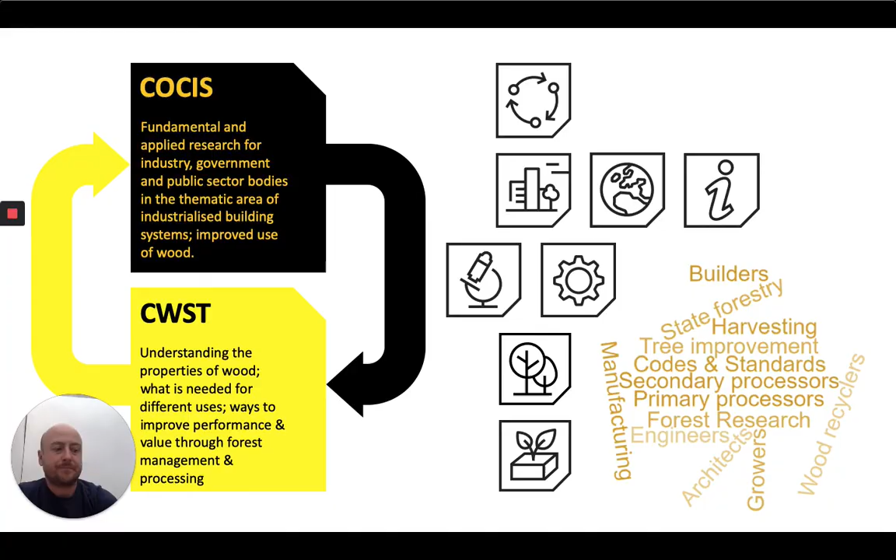So in that regard, what we do essentially generates outputs, working with the Construction Scotland Innovation Centre, and we have the opportunity to interface with the Innovation Factory there and also their funding support mechanisms and the wider construction network that they're engaged with.

The work that we do cuts across the range of off-site construction products and systems, from panelised and low levels of enhancement, that's like open panel construction, timber frame, all the way to fully enhanced panelised systems with windows and doors pre-installed. Mechanical and electrical services can also be pre-installed, as can the external facades and indeed the internal linings. And of course that can move forward into modular or volumetric construction, which can also include things like bathroom pods, where the sanitary ware is also included.

Bringing these systems together can create hybrid forms, or indeed bringing timber technologies, concrete technologies and steel technologies together can also create hybrid forms and systems. So we also think about it in terms of the hybrid nature of what can be delivered through standardised products, creating mass customised solutions. And in the mix of all of that, there's of course sub-assemblies of the component parts, such as I-joists or trusses.

So these sub-assembly components and parts can be standardised and also brought into that sort of product family architecture for utilisation. So we've worked across the spectrum of that, and those products and systems that we've worked with industry to evolve have been utilised in live projects such as the Commonwealth Games Athletes Village, which has mass timber walls, for example, and closed panel timber solutions. The Dyson Institute of Engineering and Technology, which our BEx scholars were able to get involved with.

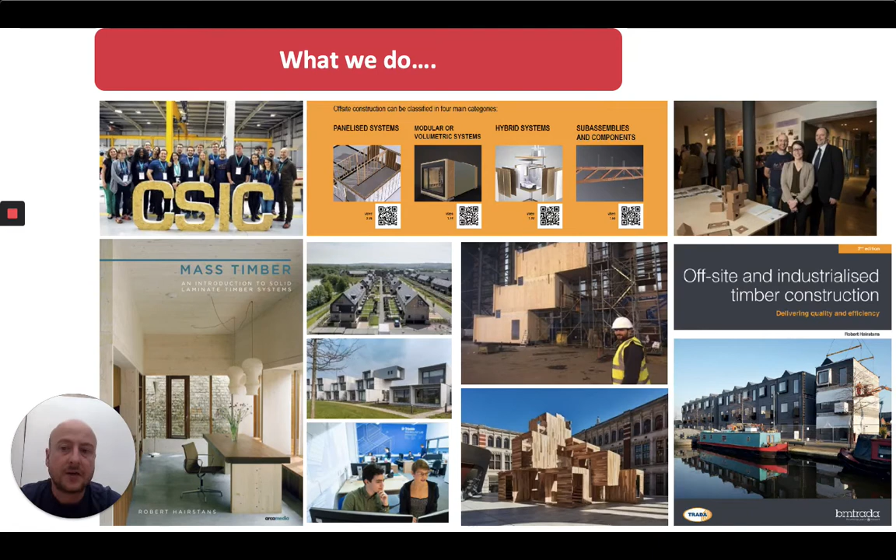And I spoke about international. Well, as an example of that, the American Hardwood Export Council demonstration project which is exhibited at the V&A called Multiply, using tulip wood for CLT production. And we look to digitise all of this, and we have a Trimble Technology Lab at Edinburgh Napier University in that respect. And of course this content is published, mass timber as an example, and also offsite industrialised timber construction.

So why I think this is incredibly important is I think actually in Scotland we have a real opportunity with respect to our renewable and natural capital. Of course, largely on the premise of our available timber resource.

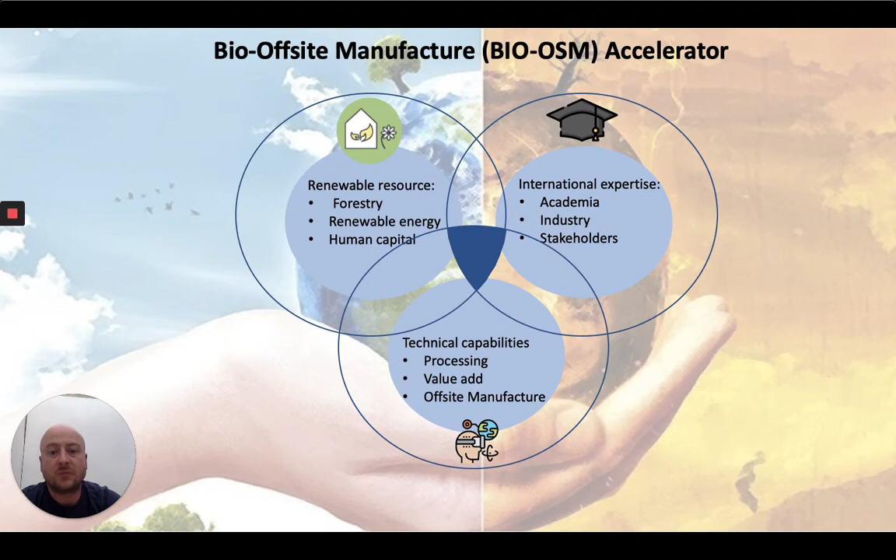So how we can utilise that forest and renewable resource, and indeed the human capital that exists, the skills and knowledge. Obviously that's something through the Offsite Ready project, for example, that we're trying to affect more. Then we have the international expertise which resides in the Scottish context, both in terms of the academic, industry and stakeholders, and indeed the technical capabilities which I spoke to in terms of the processing, value add and off-site manufacture. So how can we harness all of that to make substantial change?

So we have a forest resource. It's worth a substantial amount to the economy, not just in terms of the dimensional lumber which is produced for the likes of structural applications, but also in terms of what it can do for things such as recreational purposes. So it means a lot to the Scottish economy at scale. So it's thinking about it on those types of level, but indeed how you can maximise the use of that renewable resource for the delivery of the built environment.

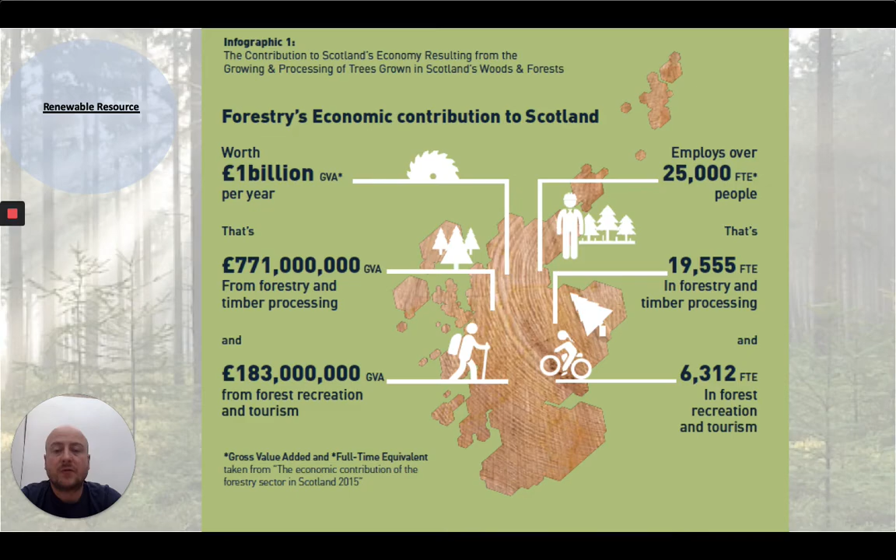And that's borne out through things like the Innovation Factory and their off-site lines, the opportunity there to make mass timber components using the vacuum press. At Edinburgh Napier we have testing facilities where these products and systems can be looked at from a structural, thermal, acoustic perspective to look at their credentials for utilisation within the built environment.

I spoke about the Trimble Technology Lab that lets us capture this information in a digital form and move it towards building information modelling and ultimately digital twins, where there's a feedback loop into the digital model to validate and verify what's been produced through that digitisation process. And of course we have the inherent capital that's been invested in terms of off-site and pre-manufacture.

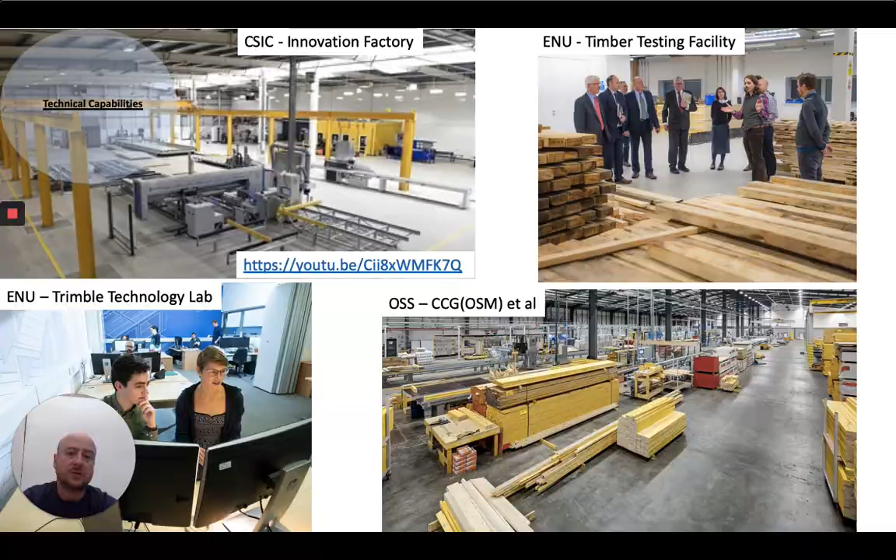Skills and expertise, Offsite Ready is certainly part of that and has now launched. The work that we've undertaken with the Built Environment Exchange, having our graduates and undergraduates be able to engage directly with industry, and very much that's the premise for this project indeed. So this is all about how do we accelerate the careers of people by giving them a broader understanding but also engaging them directly with industry. So we hope to make a real change in that respect.

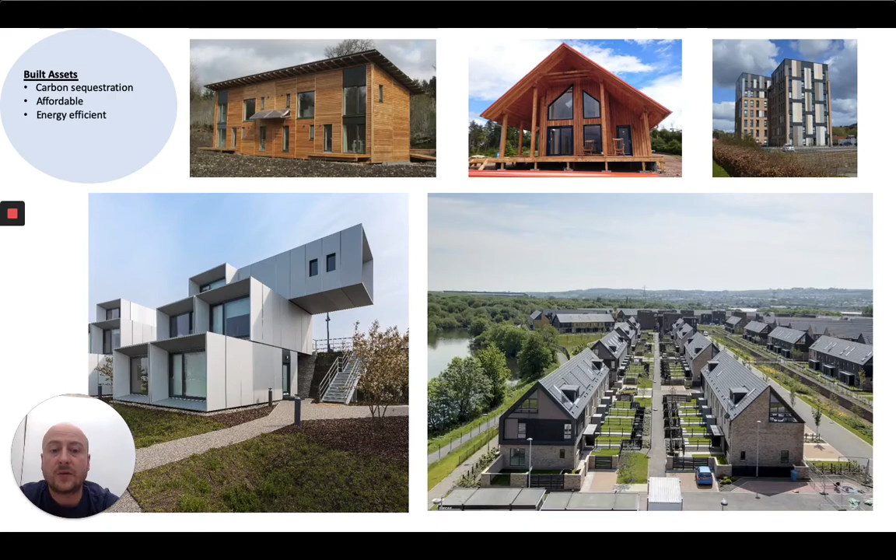And as I spoke to as well, there's a whole series of built assets out there, not just in the residential sector, and the case studies we see in front of us go from the likes of Dunsmore House, from MAKAR Construction, top left, to the projects delivered by CCG, such as the tallest timber building in Scotland, top right, in Yoker. I spoke about the Dyson project, which was delivered by Carbon Dynamic, and again the Commonwealth Athletes Village is a really good demonstration of what can be done through public and private partnership and collaboration and cooperation for the delivery of the built environment. So there's numerous case studies out there which exemplify this, and this all aligns with the premise of the circular economy.

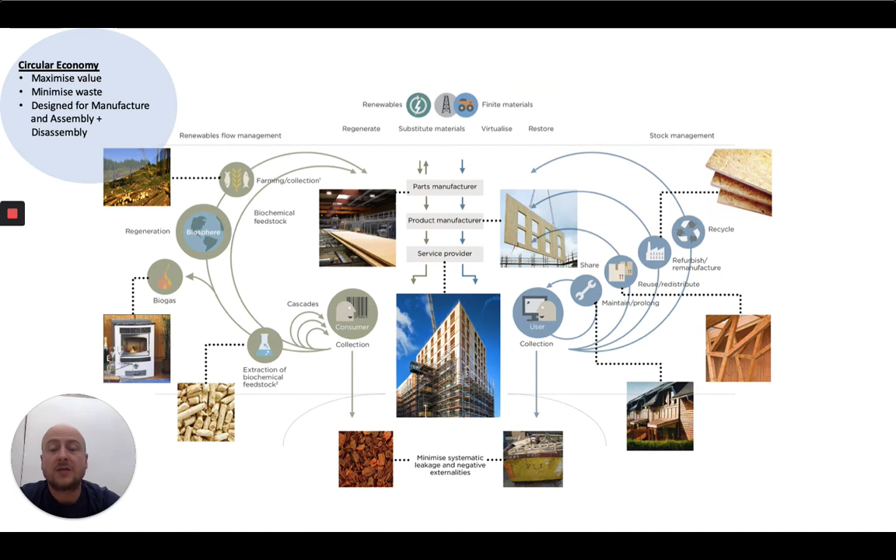How can you take renewable resource and maximise its value in order that you don't waste it and return it to the atmosphere in the form of carbon, by putting it to landfill. So before we burn it and use it for biomass, how do we maximise its utilisation within the built environment, and think of that with respect to design for manufacturing, assembly and indeed disassembly. So when that built system needs to have a change of use or be dismantled and the product's repurposed, we've thought about that at the start, such that it can take place, and we can always maximise the use of the resource and correspondingly the value that it has, in order that we don't release carbon back into the atmosphere.

So other things to think about, of course, are that digital piece, thinking about digitisation and digital twin, how these digital models can harness the global warming potential, the environmental credentials of the product, the cost information, the productivity, the waste, the logistical information from a project management perspective.

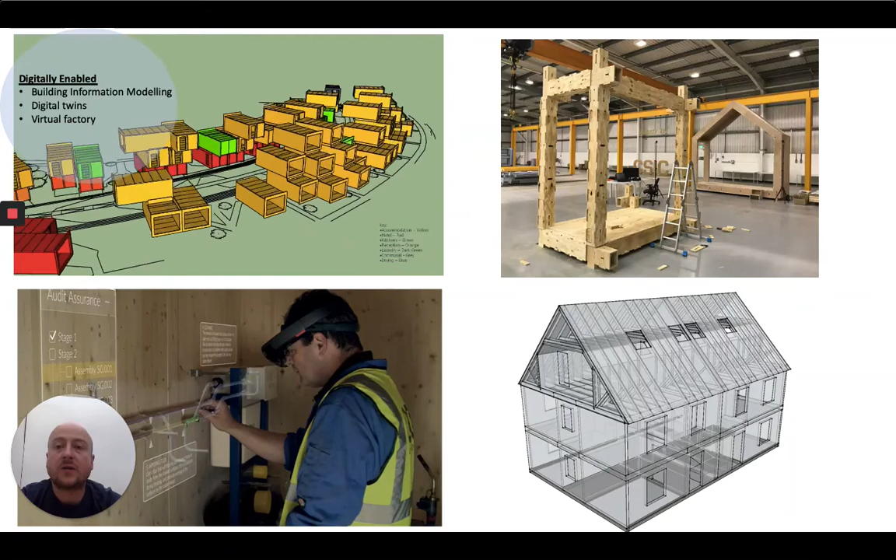How can you build as much into the digital model as possible, such that when you utilise that digital model and change aspects of your design, it informs that decision making process in real time. And ideally you create that digital model in a manner which, when the project goes live, you can track that information from forest floor to built asset and during its useful life, and enrich it.

And during that process, you can use digitisation even for things like virtual reality, augmented reality, and indeed explain to the workers where they need to install the services or apply tape for cold bridging, or look to implement the right standard details. So there's a whole myriad of opportunities within the digitisation process.

And there's good examples to even think about in terms of open source formatting. If you look up WikiHouse, you'll see information in that regard. So there's a lot you can do with digitisation, which I'm sure you're fully aware, and I'd like you to harness that indeed through this project.

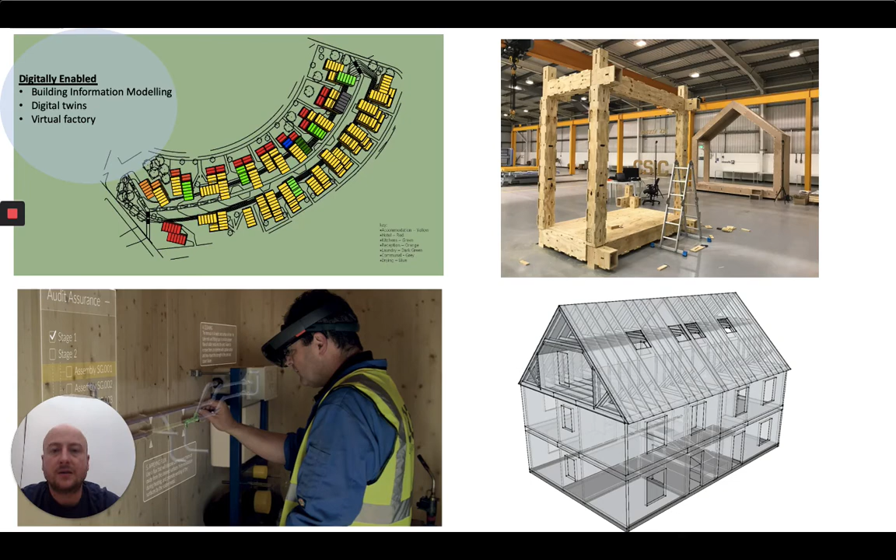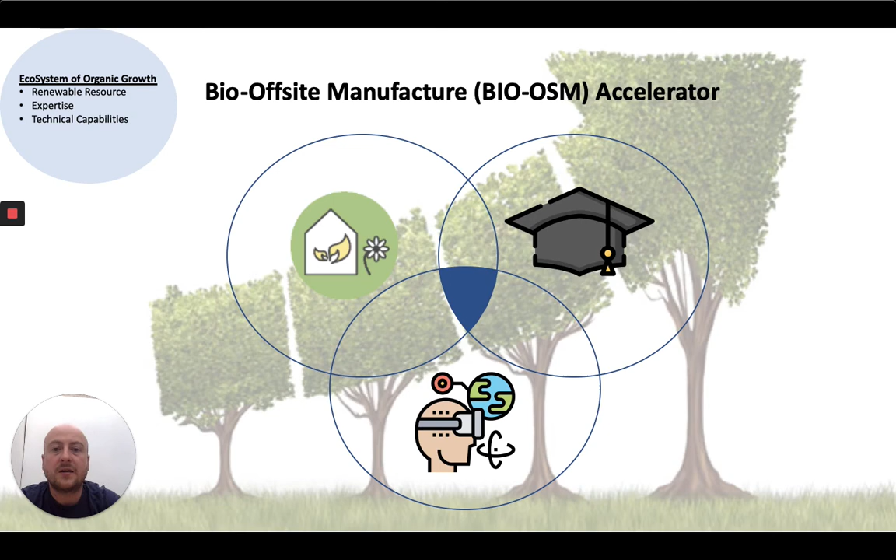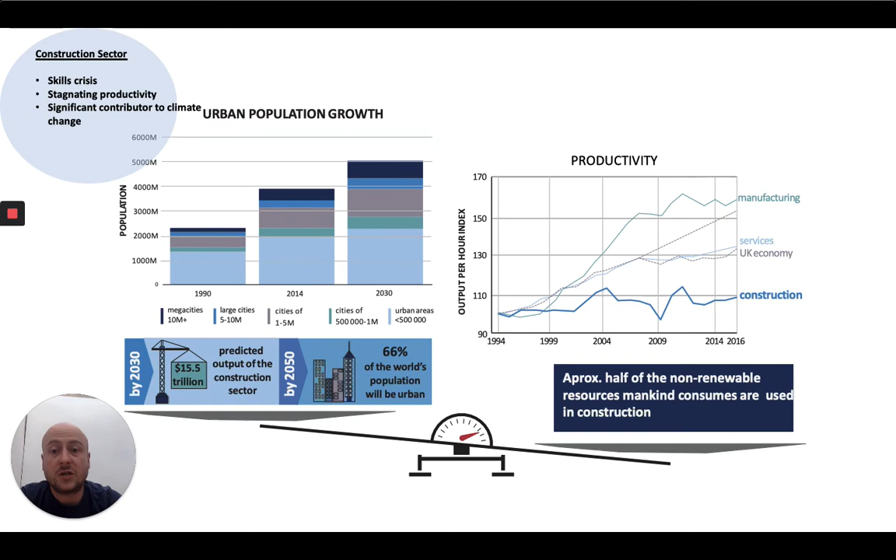And it's critically important, given the challenges around productivity. Construction has stagnated. There's a necessity to do more, but in doing more, we don't want to impinge upon the environment by using more non-renewable resources and using up our carbon budget and going over that tipping point in terms of accelerating environmental damage and change. So fundamentally, we have to think about that in many respects.

So there's a real opportunity for strategic convergence in the Scottish context, thinking about those key stakeholders: Innovation Centre, Scottish Enterprise, Napier, Scottish Forestry, Highlands and Islands Enterprise, etc. The forest products, the sawmillers, and the large groups such as BSW, and the products that they produce, including the engineered systems via the likes of James Jones.

There's the further added value through organisations such as Glenalmond Timber, Donaldson's Timber Engineering, the largest truss supplier in the UK, OCO, Norboard, who produce oriented strand board, and indeed Russwood, who produce cladding systems. ITW are based in Glenrothes, and they produce the metalwork and the connectors for these systems.

And of course, these are all utilised for offsite and prefabrication by the likes of Offsite Solutions Scotland and their membership, and the wider offsite construction sector in Scotland, which is understood fully through a Scottish Government report which Edinburgh Napier contributed to, which demonstrates the value of that sector in terms of output: 300 million, 75% of which is offsite manufacturers, a large degree of which is panelised.

And there's a real opportunity in terms of delivering affordable housing solutions in the Scottish context, but indeed across the wider UK, and how you can facilitate the utilisation of homegrown timber products within that process in order to enhance and maximise its use in the built environment.

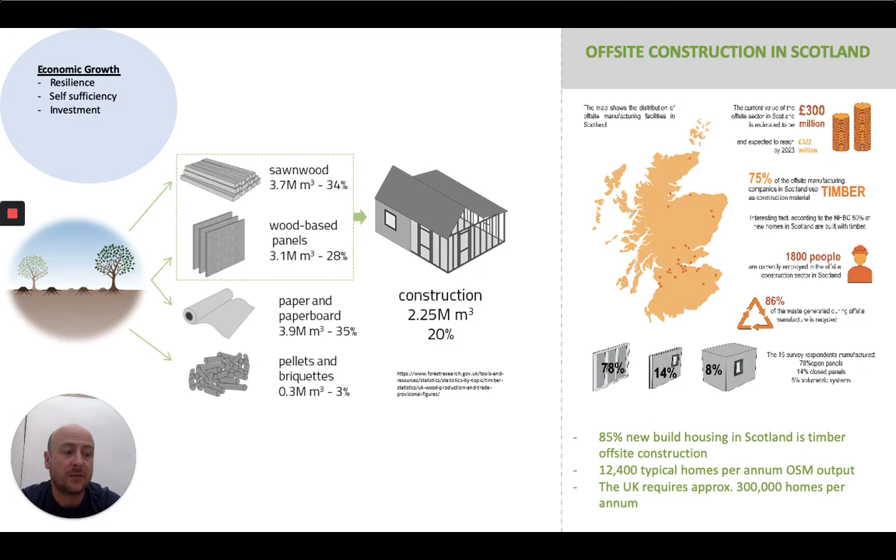So a new model is certainly something we want to look towards for jobs and wealth creation, to instigate startups and reappropriate skills, secure long-term success for currently established organisations. But there's opportunities to look to what's happening internationally.

In Norway, Mjøstårnet, the tallest timber building that's been built, fully timber system, externally timber cladding, no challenges around fire with that one as a result of the approach that they've taken. So real great international case studies we can look at and learn from, and draw upon some of that indeed for the smaller scale examples that we're looking at through the basis of this project.

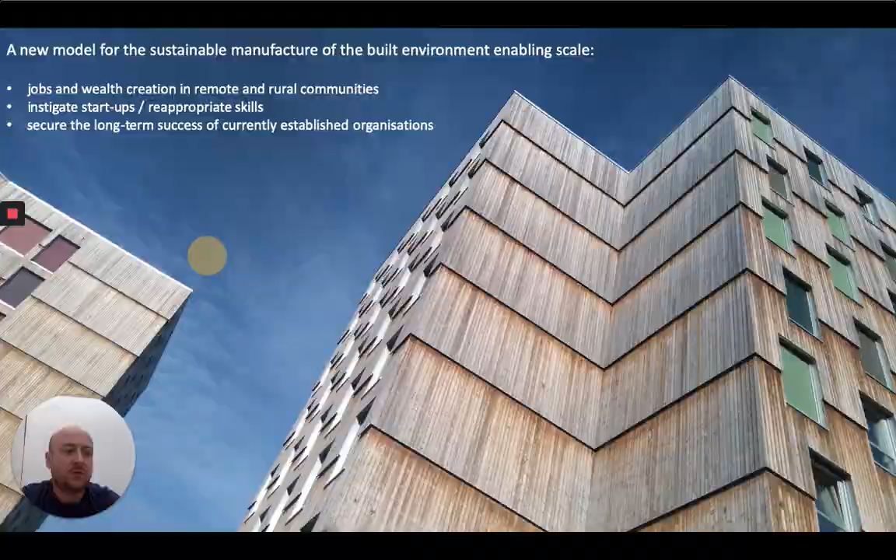And obviously, coming out of where we're at, thinking about this in terms of the challenges around the COVID crisis, health and well-being aspects, both in terms of how we live within these buildings, but what this also means for things like social distancing and how you can use off-site approaches to maximise the health and well-being of the operatives.

So, thank you for listening. Well, let's make this new normal as we come out of this a sustainable future. So I very much look forward to seeing what you produce through your work. Thank you very much for your time.